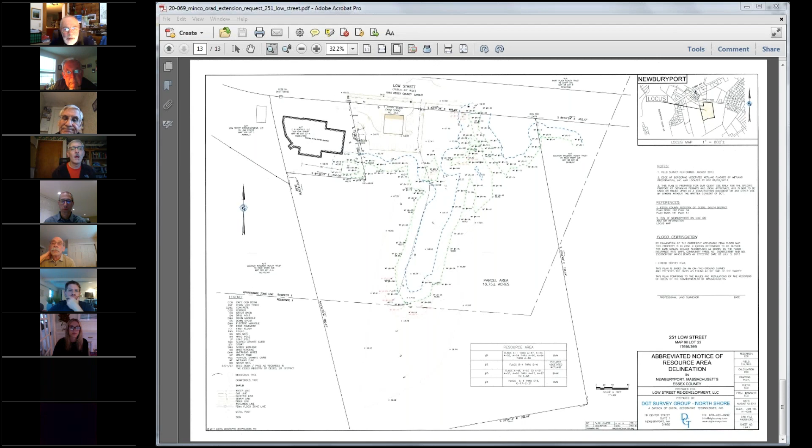So if we can get a motion. So moved. Second? Okay, who is that, second? Steve. Okay, and the roll call will be: Paul, yes. Steve, yes. Doug, yes. Dan, yes. David, yes. And I vote yes also.

Okay, next one is Nicole Young Nadeau, 6 Bain Lane, Revocable Trust, 6 Bain Lane, request for a certificate of compliance.

Let me unmute, oh okay, you can hear me. 6 Bain Lane, the certificate of compliance. I left this one on the agenda as one that you could possibly handle tonight because I believe that it's a project that was completed in compliance with the order as issued and the plans.

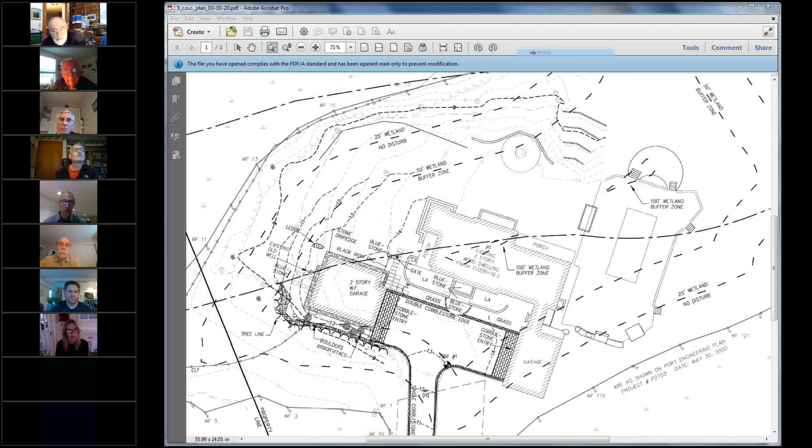It was changed slightly in configuration. There was a slight jog in the rear wall of the garage that was squared off, and in squaring that off, they also shrunk the overall size of the garage so that there's actually less impact within the buffer zone than what was approved. So that was one change.

What were some of the other ones? I have to pull up my notes, if you can hold on a sec here.

So it was 100 square feet smaller than the approved structure. They made some small changes to the landscaping as well, the pathways and planting. They had proposed some tree plantings, didn't do the exact species, but did more plantings of different species. They planted some arborvitaes in a different location. But in all, it was work in an area that was already disturbed lawn.

So basically this project has no wetlands violations, no issues with how they did it, there's less impact. I would recommend issuance of a COC on this one.

I'll make a motion to issue a certificate of compliance. Second, Doug Muir. All in favor: Paul, yes. Steve, yes. Doug, yes. Dan, yes. David, yes. And I vote yes as well.

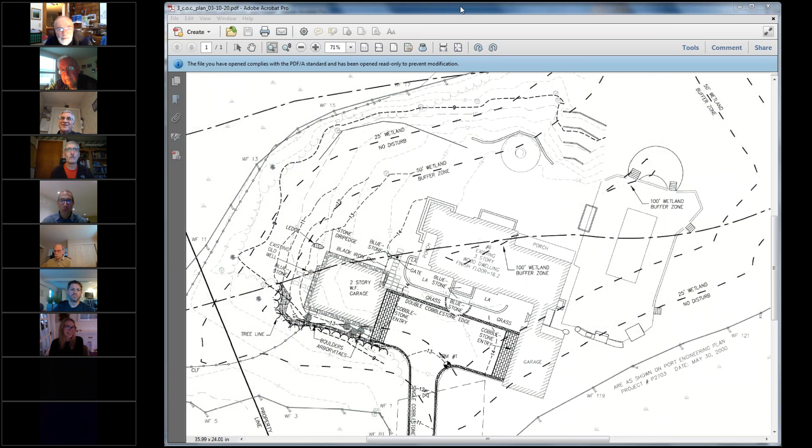Julie, you want to send that document around for us to sign? Yeah, you know how I always try to get you to sign things, so now we don't have to worry about that, right? True enough.

All right, the next item, can I get a motion to open the public hearings? So moved. Second.

All in favor: Paul, yes. Steve, yes. Doug, yes. Dan, yes. David, yes. I vote yes as well.

You have anybody from there? Lisa's not on, there's someone from Stantec for the rail trail project, but I don't believe anybody else is on here for that project right now. Okay.

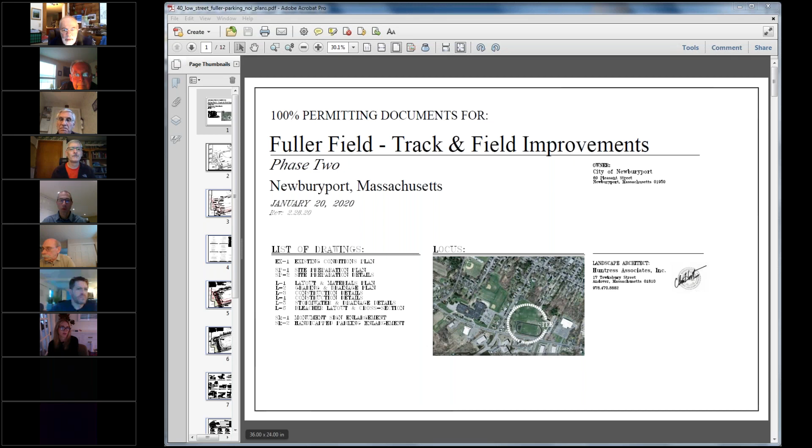So we need to vote on a variance for this? We do. The variance language I sent to you was also on the website, but I also sent it to you in my notes for the meeting. You have all the detailed variance language that they went through. If anyone doesn't have it in front of them, I'm happy to read out what those findings are.

No, I have it. Are there any - I'm satisfied with the language and the findings. That seemed to be reasonable. Were there any other remaining questions that you all had?

I wasn't at that February meeting. I know you had been asking about the stormwater, and we got the stormwater peer review from Phil Christensen. So that's been signed off on. Was there any questions related to that?

No, I didn't have any. Yeah, I think we were all set. We were just kind of waiting for the language of the variance and then for the stormwater report.

Do we have any more comments on that? Questions? Are there any special conditions, Julie?

I actually have the draft special conditions for that. Let me just see. I didn't notice any special conditions from the minutes or when I listened to the recording of the February meeting. I'm just going to quickly open the draft special conditions I put together. It's really just our standard special conditions, things like erosion controls, inspection, and that kind of thing. No stockpiling within resource areas or the 25-foot no disturb zone.

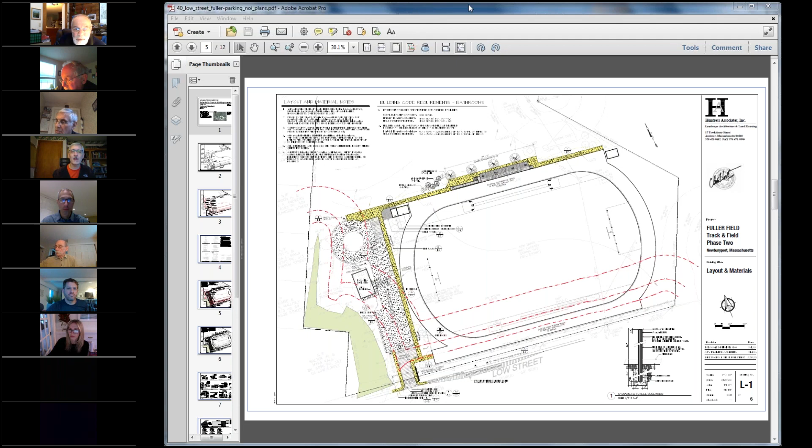Okay, next item is Paul Hogg, Harbor Master, Northern Boulevard, Plum Island Point, notice of intent. We did get some photos from Paul today, but we will be continuing this to the May 5th meeting.

Yeah, I'm going to get back in touch with Paul. Actually, he was meant to give us an actual plan that showed the revised elevations of the shed. That's really what we needed. The photographs are fine, but we need a plan for the file that shows the revised elevations. So I'm sure he'll be able to get that to us by May 5th.

Okay. Get a motion to continue? So moved. Second.

Okay, all in favor: Paul, yes? Steve, yes. Doug, yes. Dan, yes. David, yes. And I vote yes as well.

Okay, next item is Graham Sharp, 9K Street, notice of intent.

Graham Sharp obviously is not here tonight. I said the commission would maybe be able to handle this without him at the meeting, because what you had needed from him was the mitigation area, a proposed area to mitigate for the loss of vegetation from the proposed deck expansion at the back of his house.

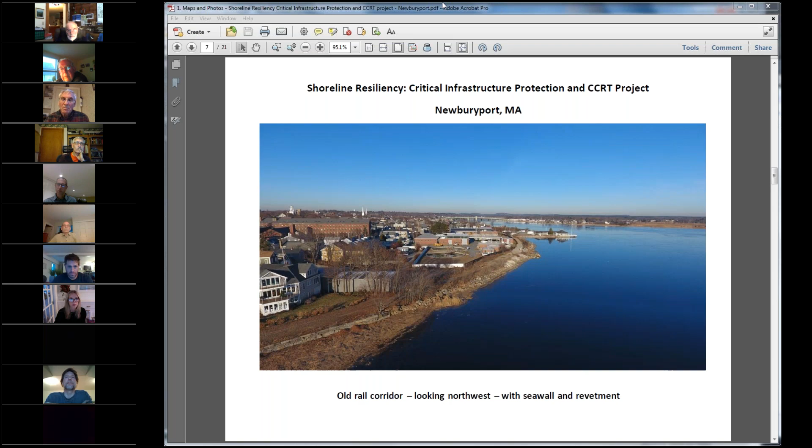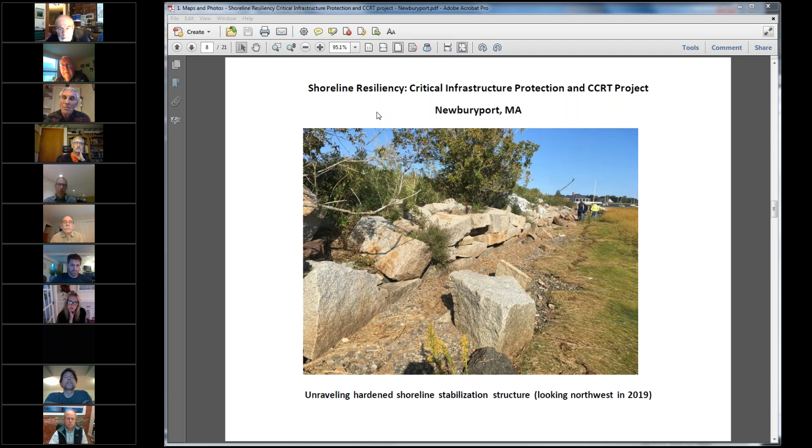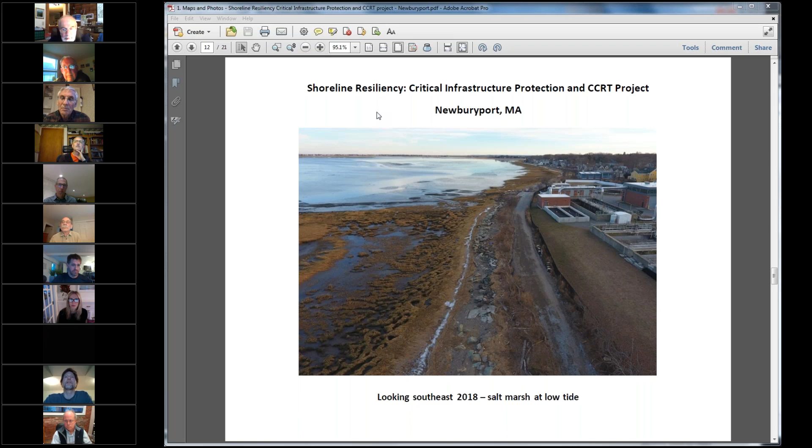At this point, this has been complicated by the presence of the underground electric lines. Andy's just pulled up a drone shot there. So we're in the process. There is still a little bit of PCB contamination in this section. However, we're dealing with getting right down next to the underground electric line duct banks, and there's an obvious public safety issue of getting too close to these underground lines, undermining them, etc.

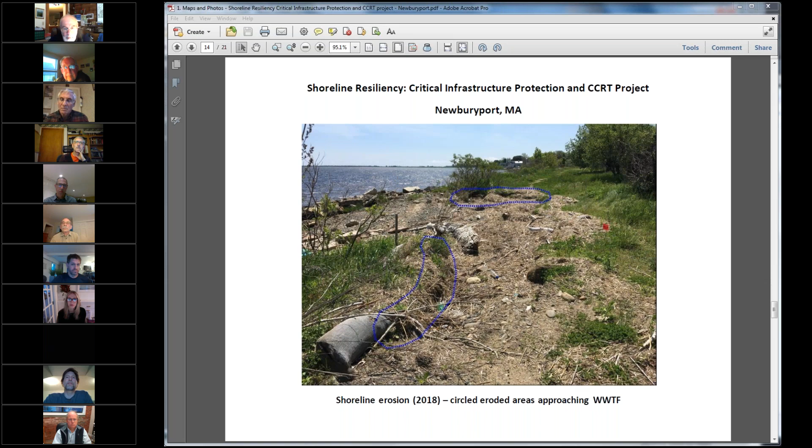So our LSP is in discussions with DEP and EPA right now, and we basically say, alright, we've done what we can, what's feasible. We're going to cap it with 2 feet of clean fill, put in a geotextile covering, impose an activity and use limitation, and then through the project we're talking about right now, the subject project, we're going to add another 3 or 4 or even 5 feet of fill on top, plus the asphalt trail on top, and it should be well.

Jordy, a threshold question about the PCB contamination. Will the revetment idea enable you to do less by way of remediation of the contamination than you would otherwise have to do if you weren't going to go that way?

Part of the argument the LSP is making to the regulatory authorities is that we're going to have this subsequent project where we build this revetment and the associated berm, which will cover up this material under a lot of stone and fill. So that's part of the overall approach to make the case this is a safe and efficient approach. In other words, in terms of closing out the site, you're capping and putting an AUL on it rather than removing the rest of the contamination.

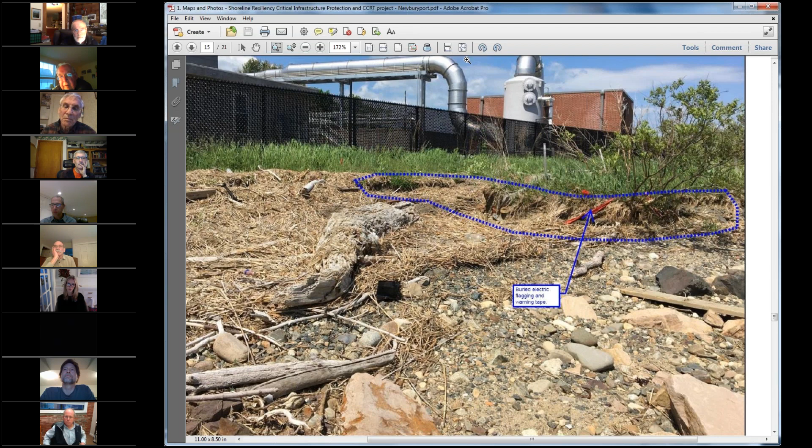My only concern, reason for asking, is it would be a shame to put all this very expensive stuff on top of it and then find that it's failed for whatever reason. I really don't think there's any concern about that — they build these things to stay in there indefinitely for decades, and they have a manhole system for accessing them.

So when it's covered up, they never intend to go back down and do anything to it — at least through the manholes, they can investigate from time to time if they need to. Yeah, it's built so they never intend to actually excavate in order to get access. Maybe should have said that — the manhole and duct system, as they call it.

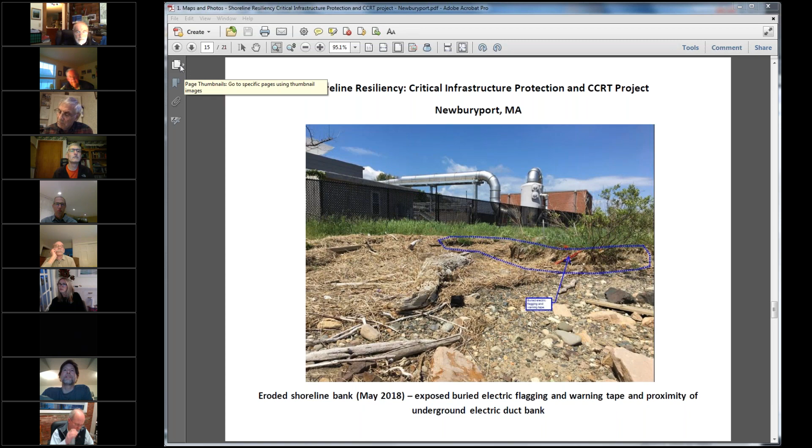So that's essentially the status of the PCB work. We're coming hopefully to a conclusion relatively soon on that. On a parallel track, we've been working on the planning and permitting for revising our approach to this shoreline. Part of the rail trail project has been essentially combined with the climate adaptation planning that's been going on for the past couple of years in the community, with a focus on the wastewater treatment facility.

That other slide Andy just pulled up shows the scouring that was the worst part from those couple of storms in 2018. Those are the areas we plugged with the temporary shoreline stabilization gabion baskets. The general consensus arrived at maybe about a year ago, with our consultants GZA and Stantec, as well as the city's additional consultant Dewberry — hired with a municipal vulnerability preparedness grant to do a detailed risk analysis and focused study and recommendations on how to protect the wastewater treatment facility.

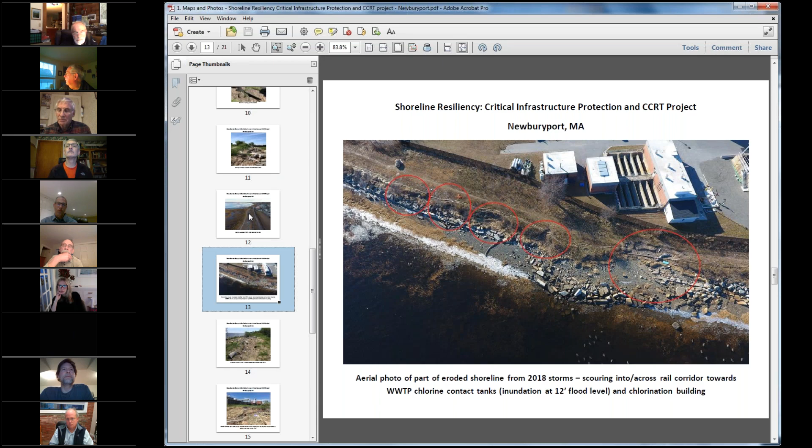The outcome of that has been that the most cost effective and most feasible approach is to rebuild this revetment and this elevated berm. Andy, maybe if I could ask you to go back to the first couple of slides that show the old railroad.

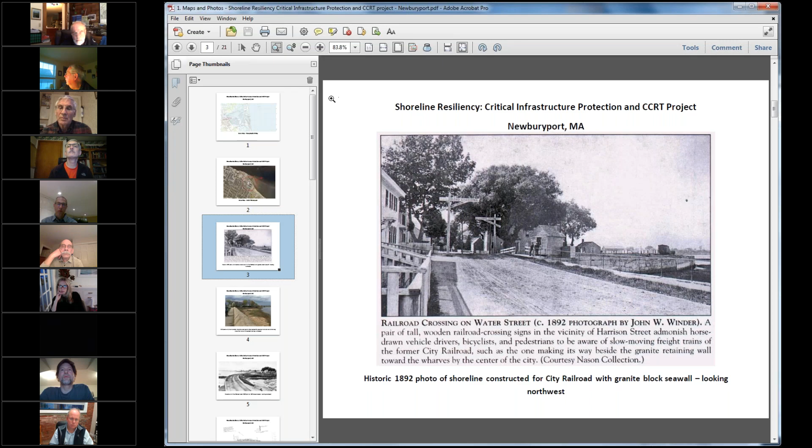So that's one shot, 20 years after the railroad was built in 1892, from Water Street, showing the vertical granite block wall that extended out along the new shoreline the railroad created on filled tidelands there.

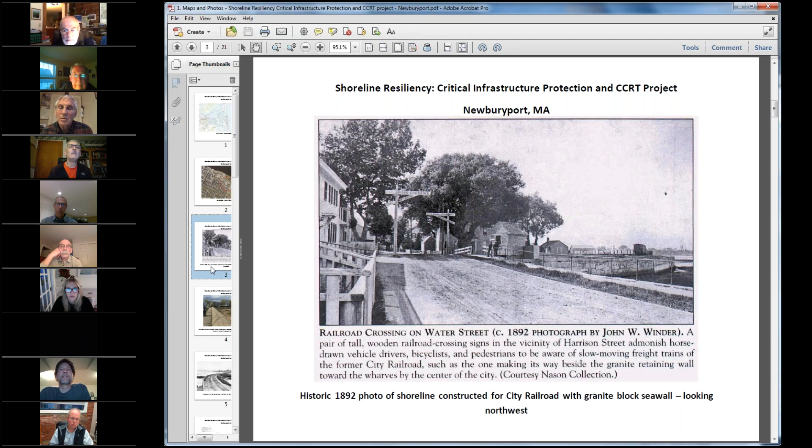Next slide shows a current view of that same wall, and as it heads northwest towards the American Yacht Club, you can see, even though it's small in this image, the stone starting to unravel as it goes north.

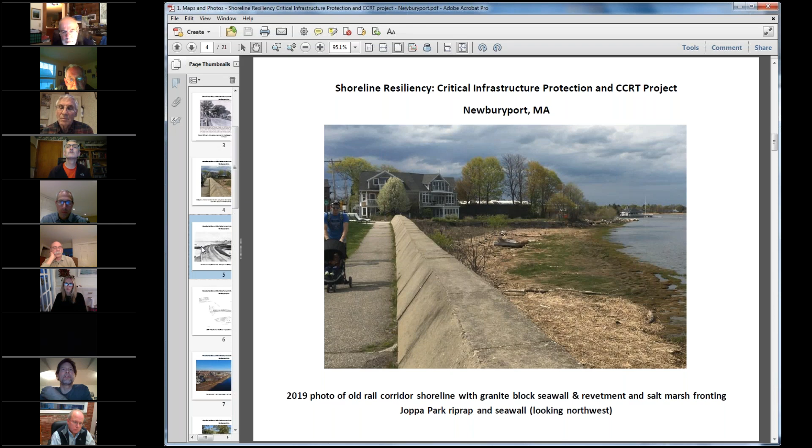When the railroad originally built it, they didn't entirely fill in everything, and then that was filled in the ensuing decades.

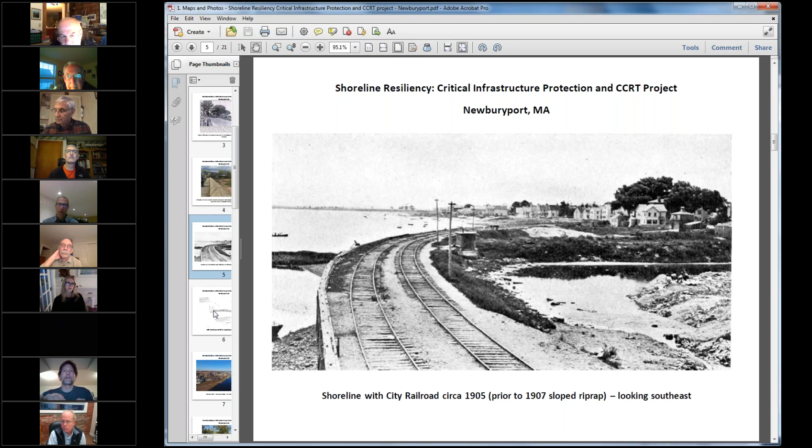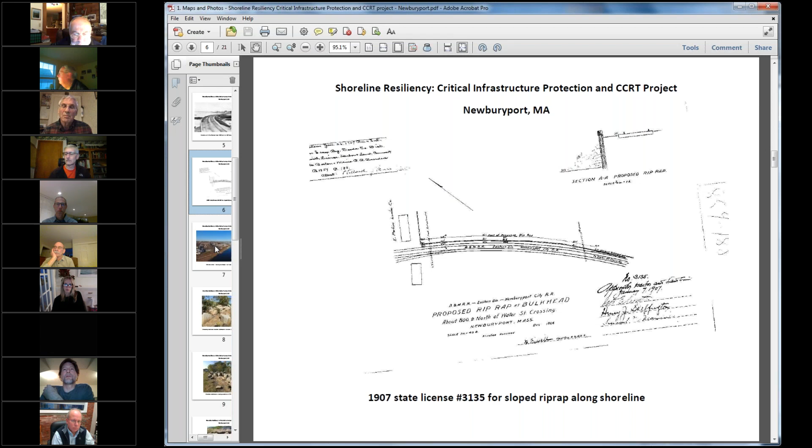I was just mentioning this 1907 license for riprap. So basically, a sloped stone revetment was added as additional protection to the vertical seawall along the length of the shoreline here.

We're not aware of much work, though some other stone has been put out there over the years, but there hasn't been a substantial effort to maintain this structure for many years, many decades.

The wastewater treatment facility was built around 1960, if I'm remembering right. The railroad itself was abandoned a decade after that, in 1972.

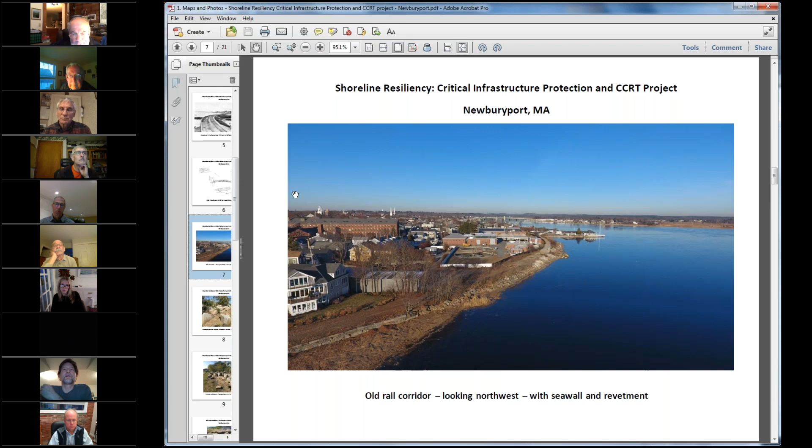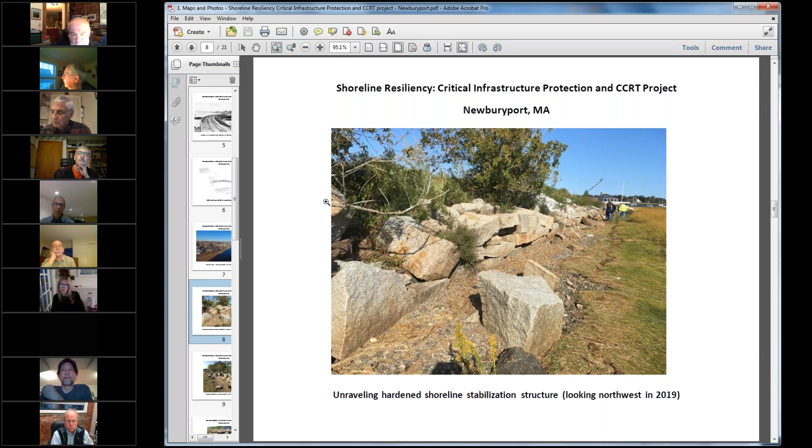If you click to the next slide, it shows a couple images from the ground level of the sort of remnants of the stone, some of that stone starting to fall down, being pushed around.

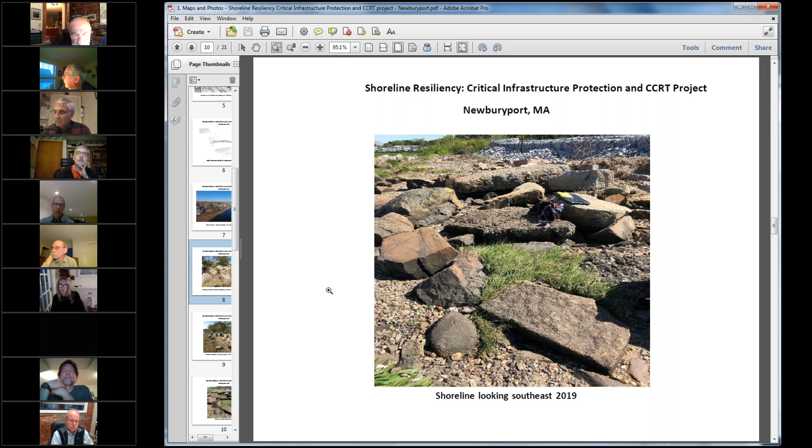Part of our project is to pull back this stone out of the beach area, which will improve the prospects, presumably, for the salt marsh in some of that area, and use some of that stone to rebuild this revetment and raise it to an appropriate level of 14 feet.

Part of the alternatives analysis was that there's not room to build a berm inside the wastewater treatment facility. You can see how close some of the structures and buildings come to the fence and to the shoreline.

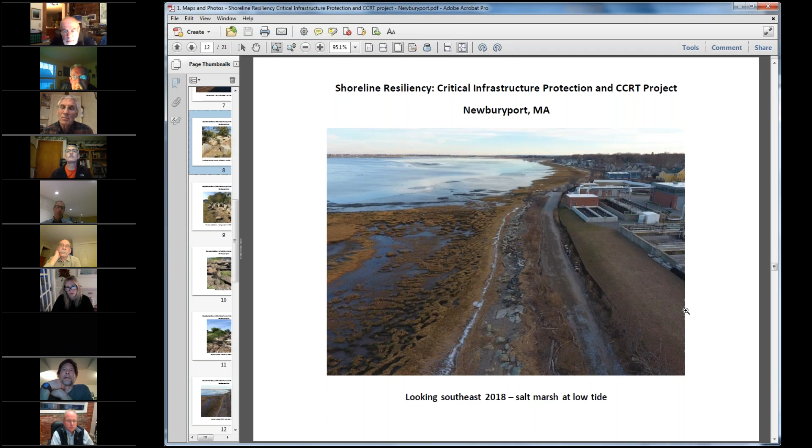We've positioned this trying to keep it basically as far away from the salt marsh as possible, so it's not going to impact the salt marsh—it's above the line. But we also need to stay away from that duct bank.

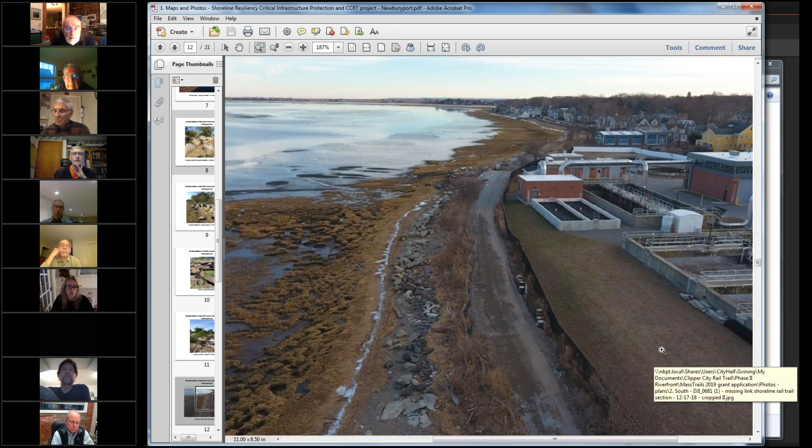So we sort of adjusted the plan so that it's in between those, rock and a hard place. In terms of the height of the structure, that's based off the existing FEMA base flood elevation of 12 feet for the wastewater treatment facility, and 14 feet for the rail corridor.

Water Street is 13 and a half feet. So part of the analysis is it doesn't make sense to build a 20-foot berm and revetment, because water would essentially just go around it onto Water Street and do an end run.

The appropriate level at this point was settled at a 14-foot revetment, 14 and a half foot berm with the trail on top, and that addresses the current FEMA base flood elevation vulnerability, as well as gives us a bit of room for sea level rise in the coming decades.

Newburyport was using the projections of intermediate high, I think, from NOAA, and obviously there's lots of opinions—I hear them almost every day from abutters and other people about what will actually happen. But that's the forward planning that we're trying to include in this.

Unless there's a question for me, rather than my just doing a monologue here, I can pass this on to Stantec and then GZA to walk through the plans. Does that make sense? Is that good for everybody? Yeah, yep, fine with me.

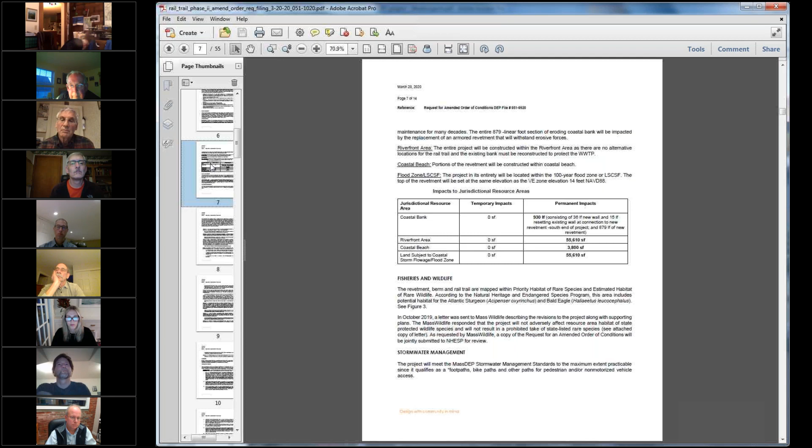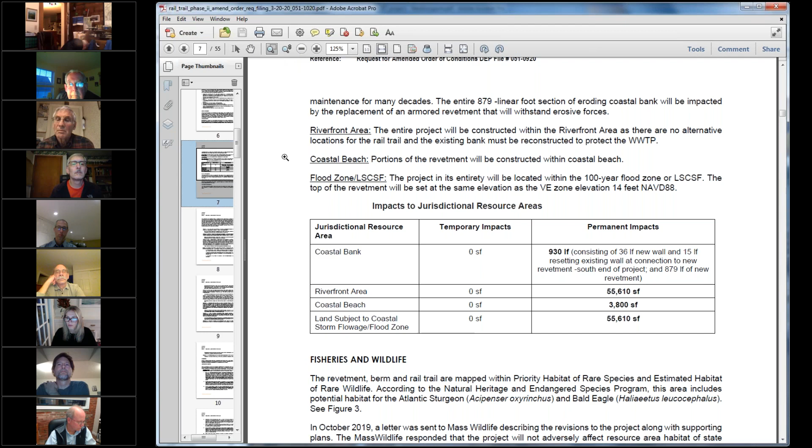The coastal bank is now 930 linear feet, consisting of a couple subcomponents: 36 linear feet of new wall, 15 linear feet of resetting the existing wall at the connection to the new revetment, and 879 linear feet of new revetment. The only other resource area with work proposed is Coastal Beach, mainly for foot traffic but also for constructability, totaling 3,800 square feet.

I did receive a call, as did Jordy, from one abutter, and I didn't get to speak with the person in person. We exchanged messages, but Jordy did speak with him. It's a person at 179 Water Street. I don't know if you want to describe your discussion, Jordy.

Sure. I've been working with the abutters for many years on the project, so I've periodically checked back in. The question he was focused on was what was happening essentially right in front of his property.

So Stantec did a little analysis of how high the trail is going to be above the existing grade. We'd always been planning for the trail to be about a foot above the existing grade as it heads northwest from Joppa, essentially holding to the existing height of Water Street there.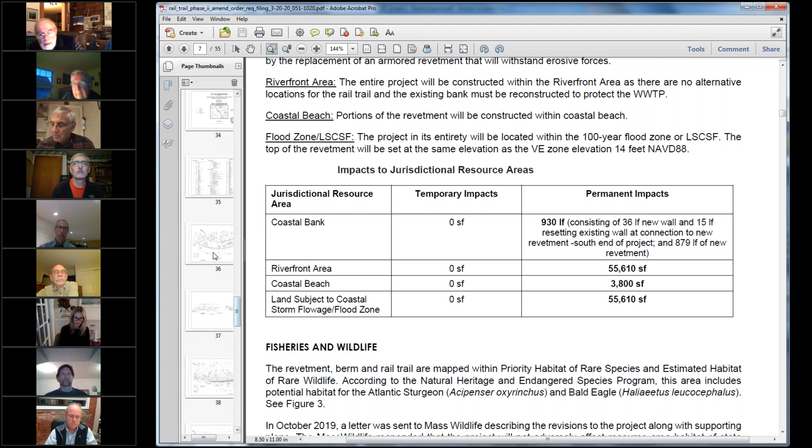Just to touch on what Ann's saying, I'll speak to the trail, then hand it off to Dave Smith from GZA to talk about the revetment more specifically. As far as the trail is concerned, there's about a 1,200-foot gap of trail that was previously constructed. We're looking to match the same typical section.

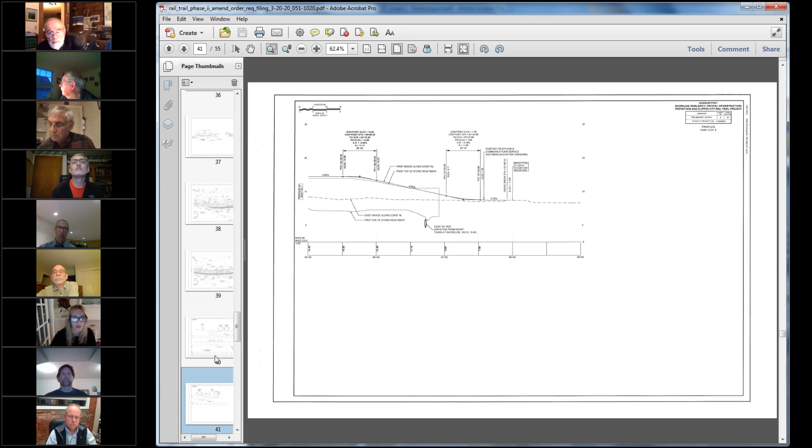I believe there was page 4, sheet 4 of the plans that had a typical section on it, and it shows 10-foot wide paved trail with 2-foot grass shoulders on each side, maintaining that 12-to-1 slope for recovery as part of bike safety.

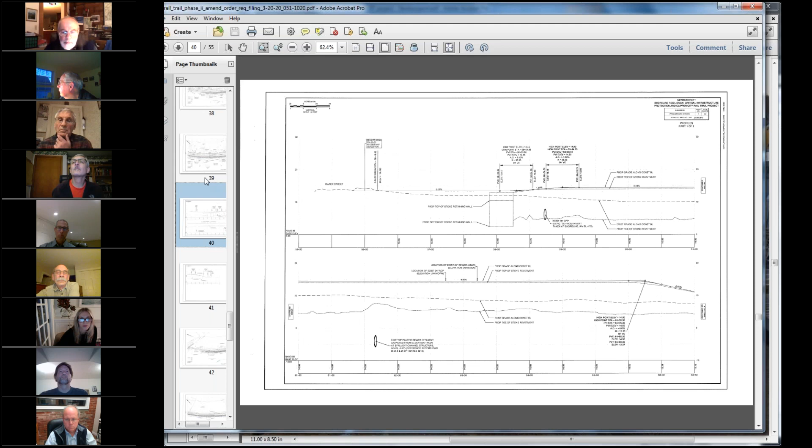One of the questions that came up on the scoping session for the ENF yesterday was how much landscape area is there between the trail and the revetment. That kind of varies along this stretch. It pinches down at one point, but generally there is anywhere between 8 or more feet, usually between where the revetment starts and where the edge of the pavement of the trail is.

On the side of the wastewater treatment plant, we are looking to slope down and meet there. We are actually getting some additional spot grades and survey as part of the PCB construction to confirm how the site is going to be left out there. We'll just be confirming ultimately the drainage patterns, that we are going to maintain what has happened today and where everything is drained from that site and even from the former rail corridor, so that we're not impacting anything with meeting the new elevation out there.

I was just going to note that we've been working fairly closely with DPS on that, the engineering department, Chris Pratt and everybody else. At their recommendation, they felt that we needed updated survey information for not only the rail corridor where we've been working, but inside the treatment plant. Because of the work that's been done there the past couple of years, we did mobilize Bryant Associates to get updated survey information out there to make sure that our low points and high points and our drainage patterns are going to work in that area. So I just thought I'd add that.

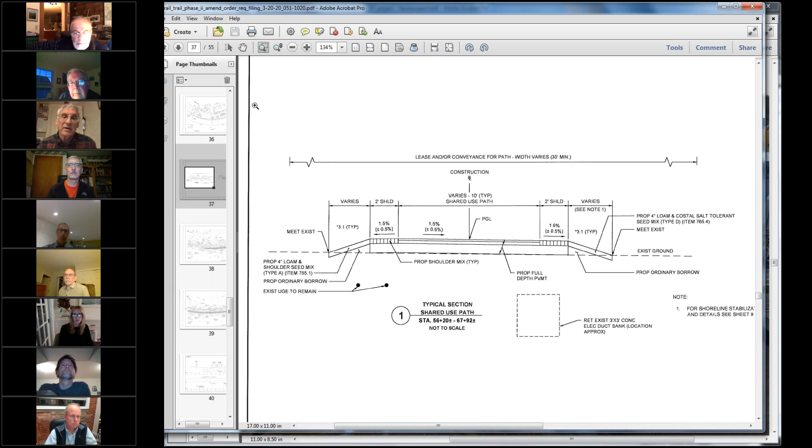Okay. In that regard, could you explain in plan view what the drainage patterns are, as far as how the water exits behind the berm or landward of the berm? Yeah, I had the same question, I couldn't really find it on the plans.

Yeah, so if you look on the sheet that's up on the screen now, do you see the thick black line with the arrows on it? What sheet number is this, please? This is sheet 5. Hang on, my computer's delayed. Sheet 5, yeah, sheet 5. Okay, because I can't scale what I see on the screen, so I have to do this on another. No, that's fine, I have like a bunch of things open on my screen as well.

So if you look at the line, we showed how the drainage is currently going based on the survey we had previously. It's that line with the long dash and the two short dashes, and it shows the direction of where we anticipate the water to go. When we submitted the 25% design level plans to the city this winter, which is virtually what you're seeing here, there were a few questions that came out of it about work that was done in the wastewater treatment plant, and we wanted to confirm that this is accurate, and that if there's any other grading we need to do on that side of the trail to ensure that we're not going to be pooling water there, which is the reason for these additional grades.

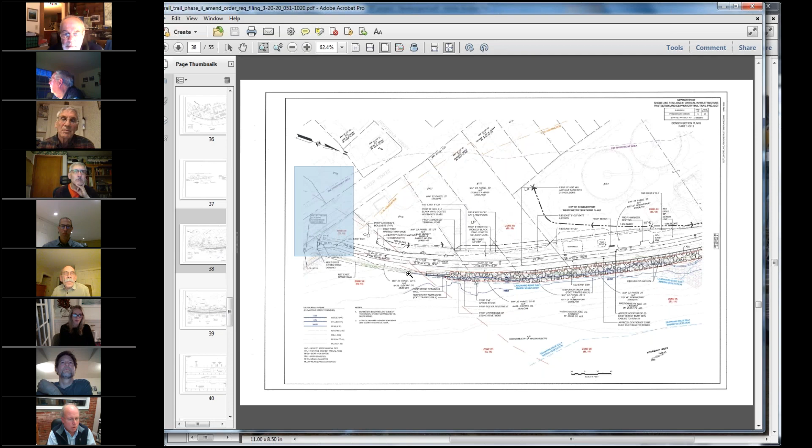Our role in this project is the revetment design to protect the rail trail. Our design, I'll start at the southern end of the rail trail system, approximately 175 feet from Water Street and the Joppa seawall there. As you saw in the earlier photos, it's a granite stone wall that runs along that shoreline, and it isn't in that bad a shape, but about 175, 180 feet in, it starts to ravel away, as we saw in the other photos.

The wall is just stone that's kind of raveled out onto the beach. So at that particular point, there's this 15-foot section of that granite block wall that's going to be rebuilt and reset in kind. A couple of the stones have fallen off, and we feel they can easily just be reconstructed within that 15-foot stretch. As you go further north, the wall pretty much crumbles away and it's non-existent in that location as it continues all the way north to the yacht club. It's just a jumbled mess of partial revetment and wall stones.

For that 36-foot section beyond the 15-foot repair section, we're going to rebuild that wall. It's going to have a concrete footing, and we're going to rebuild that wall back up to the original height, utilizing the existing stones that are there and also some supplemental stones. The reason why we're building a wall in this section is the salt marsh is pretty close to the structure at this point. So if we were to start our revetment there, our toe of the revetment would need to go further out, which would impact the salt marsh.

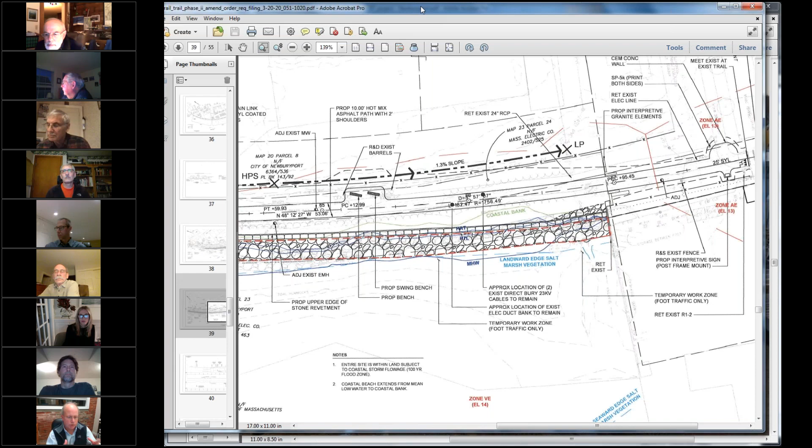The existing stones that are out there, the suitable ones, we're going to reuse. We're anticipating about 25% of the volume will be reusing those existing stones. If you remember the drone image after the 2018 storm event, you can see where a lot of that stone raveled out onto the beach—we're going to recover that, even the stone that's not usable.

That white line is probably the high tide line. It looks like where ice has formed in this photo, and you can see it's just a jumbled mess of stone out there, with a lot of debris—concrete, metal, timber. That's all going to be removed and pulled back. We don't plan on excavating stones out of that area to recover them; if they're just on the surface, we'll pull them back.

The thought is that the salt marsh would be able to recolonize in that area. We won't leave any divots, obviously, but that's the idea—pull everything back landward to roughly where you see that vegetative line between the stone and the trail. It'll be within that basic footprint. And I think that's about all I have.

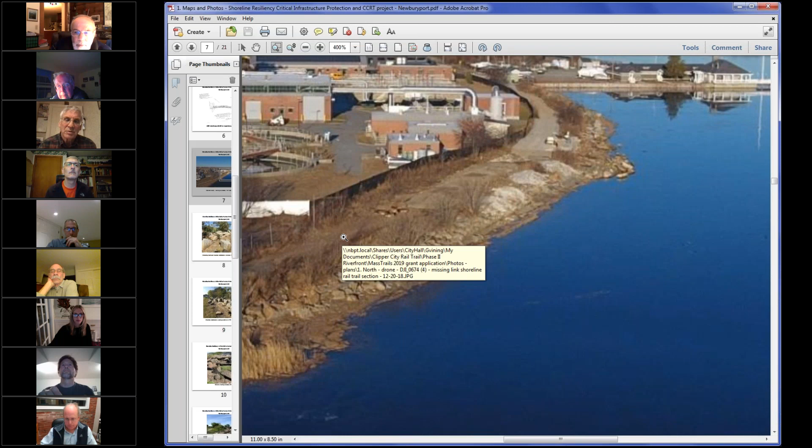Couple questions, Dave. When you put the toe stone in, you're going to be excavating—that material is going to be removed from the site. That's correct. And as far as dewatering, is that an issue?

It looks like there's not a lot of room there between deliveries and everything else. We haven't quite gone into the detail of logistics on construction, but it's going to have to all take place within that rail trail footprint. So that material is going to have to be stockpiled there and dewatered. Obviously we're not going to be doing the work in the condition you see in that photo—it'll be done even though we're above the high tide line, it's still going to be done when the tide is not high there. We need to be able to dig down to set those toe stones.

And the elevation at the top of this, that is the FEMA—is that the still water level? I mean, what about run up and so forth? How does that all tie together?

The Stillwater 100-year elevation at the site is 8.9. So when you take into account wave setup and wave action due to a coastal storm event, it adds about 5.3 feet. So with run up at the site, it's about 14.2 feet, which is pretty close to the 14. Obviously in the northern end where we're transitioning down from elevation 14 to 11, it could potentially be overtopped in that area.